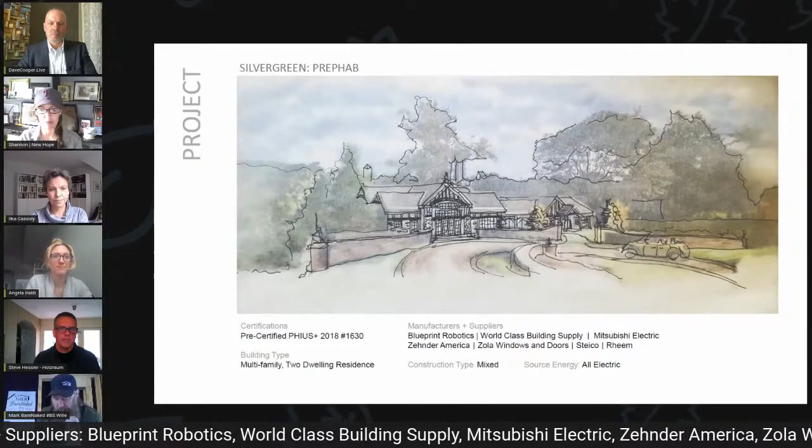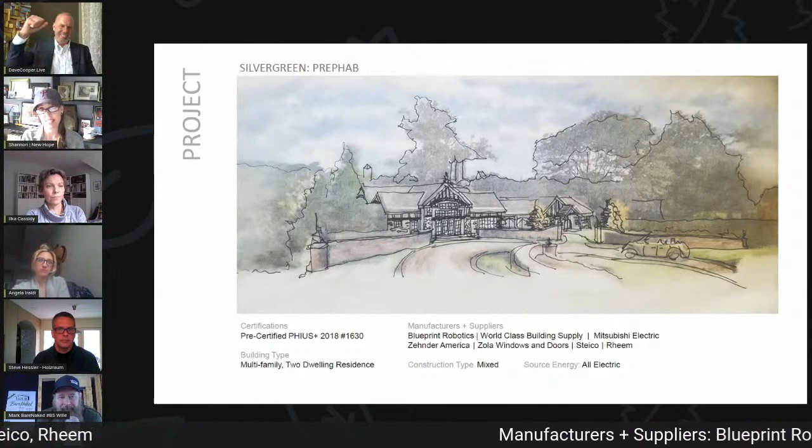So this is Silvergreen. I'm Shannon Pendleton, designer, Passive House consultant, Sanderson Design, on the East Coast in New Hope, PA. And Silvergreen is about 30 minutes away from me, and it's a Passive House. So we're going to explore how we got here, why Passive House, and then why prefabricate, because we chose prefabrication. It was the first time for me. And there's some lessons learned to share so that you can do it too. So we'll look at how those two choices changed our process and solved coordination challenges, and what we'd repeat or improve for next time.

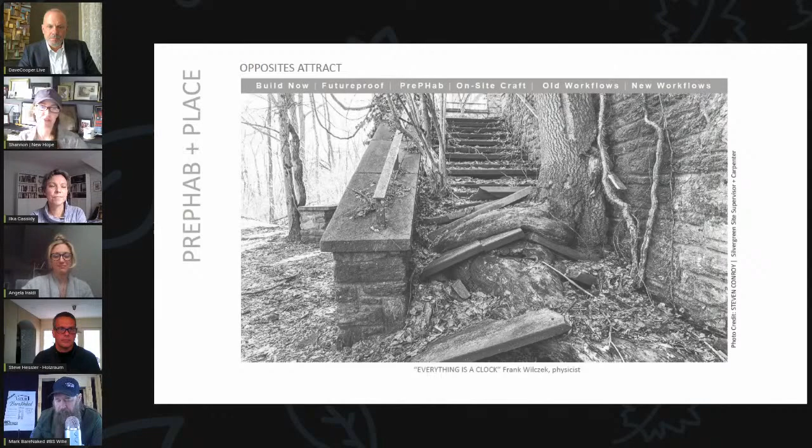So basically, our client asked us to design time and gave us the opportunity to marry a number of opposites. She wanted the house to look old, think new, prepare for the future, bring her community together, celebrate its past, and be an example for its future. So Silvergreen is 2 dwellings with a shared garage, a large community event space. It's all electric.

We took out the gas meter, and it's pre-certified 2018 plus right now. We're about 4 months from completion and about 10,000 square feet for everything.

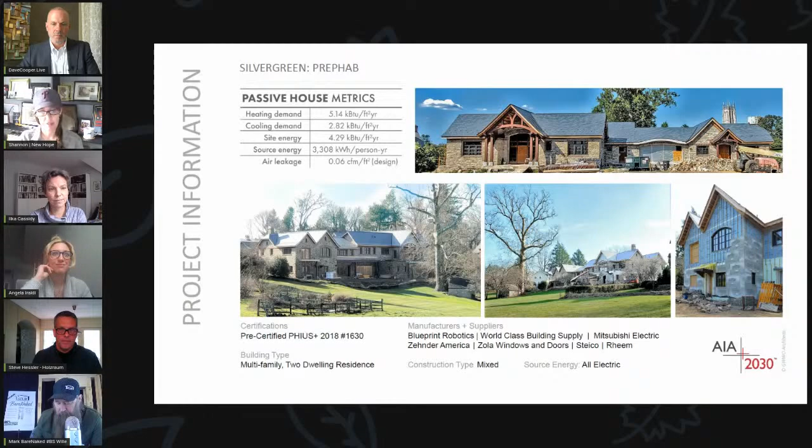So we were about 50% passive house experts and 50% first timers. But our experience was heavy on the design side. So we chose prefab to keep the hard build parts easy, the wall assemblies and the window installations. So we did it right.

Shannon, let me ask you a quick question. Can you just explain to our audience what IPD means? Because we're bringing two communities together here, and I think that would be very important for them to understand.

Right, so integrated project delivery. It means you assemble all the team players early, right? So if you want to take it down to just two, if you're an architect and you're drawing for a builder, it's great to have the builder around because you can call them and say, I'm drawing this detail, how do you want it built? Because there's no point in drawing it if you don't want to build it that way. And the two of us figuring it out together saves time and makes a better product.

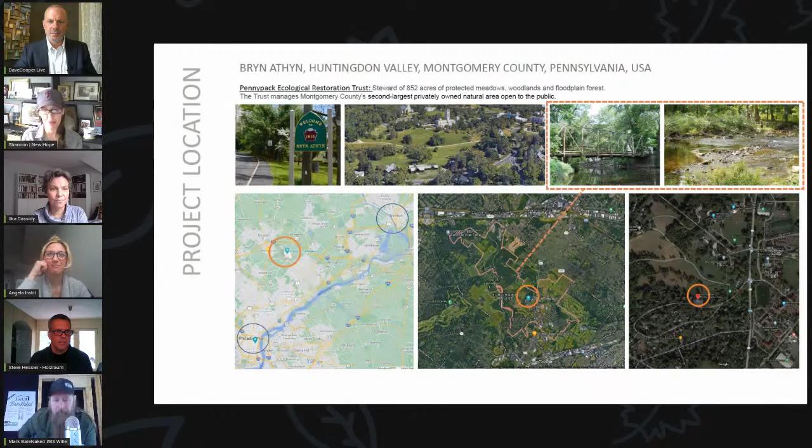So let's talk about where we're located. We're in Bryn Athyn, PA, and we're on a steepish slope. We're between Philly and Trenton, New Jersey, alongside a National Historic Landmark District and the Pennypack Ecological Restoration Trust. So our design priorities were for two sustainable homes that would fit with the community now and rent affordably now, and renovate in 20 years for aging in place when the owner wanted to move in. And we needed space for big family gatherings, a future accessible space for community events and fundraisers.

And if you look at these pictures, our oldest living residents on the site were the natural spring, the spring house, the wetland, and a 300-year-old buttonwood tree. And we also inherited a sentimental rental up there on the upper left, known as the Bishop King house, that we had to take down. We tried to save it, but it just wasn't enough to save, unfortunately.

So we also inherited the history of Bryn Athyn, which was actually founded and planned on our site, which is in the top center, back in the day. And luckily, the 4 windmill foundation stones are still there, and they supplied the community water supply.

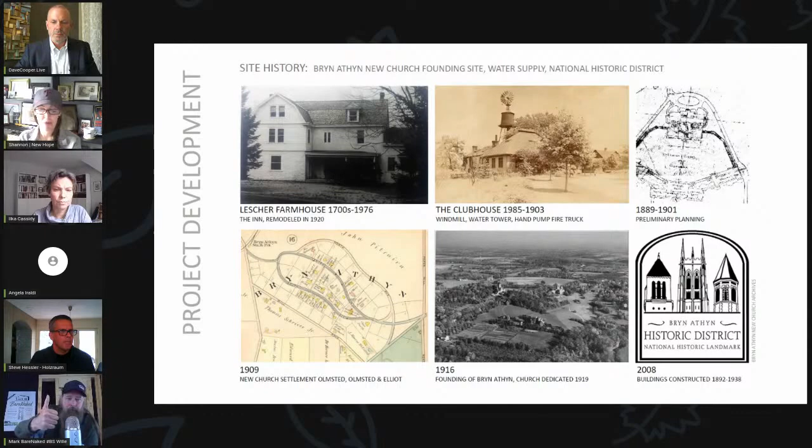So it's pretty poetic. So we talked to Susan, we determined our level of green, talked about the importance of certification, and gave her a crash course. And she chose Passive House. She's like, if we're going to do this, we're going to get the highest efficiency, the best comfort, and we're going to do it through passive means, conservation first. You don't even need renewables. You get 80 to 90% of the way to zero. No renewables, right? Just building it better.

And then using Living Building as our guide, right? It's harder to achieve. It can be a little more expensive sometimes, in my opinion. I'd love to be proven wrong there. But it helps with materials, with water, with site, with equity, and with health. So we were certifying Passive House, but we were referencing Living Building a lot for our products so that everything could be carbon smart and healthy.

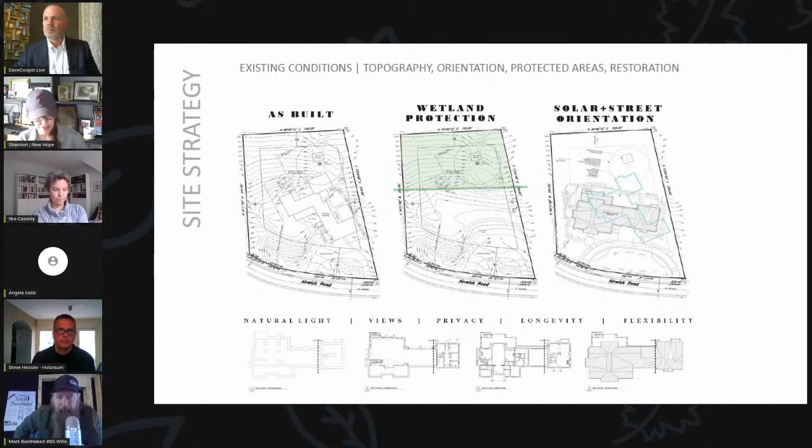So we determined our strategy and did some site planning for protecting our natural features. Looked at our solar exposure so we could do natural lighting and power potential. And we were aware of our position at the top of the watershed. And Think Green did this beautiful drawing. They basically drew up a series of strategies so that we could infiltrate all our stormwater, even during heavy events, over a series of days, just through gravity and rain gardens. And it flows through these destinations and past our windmill stones.

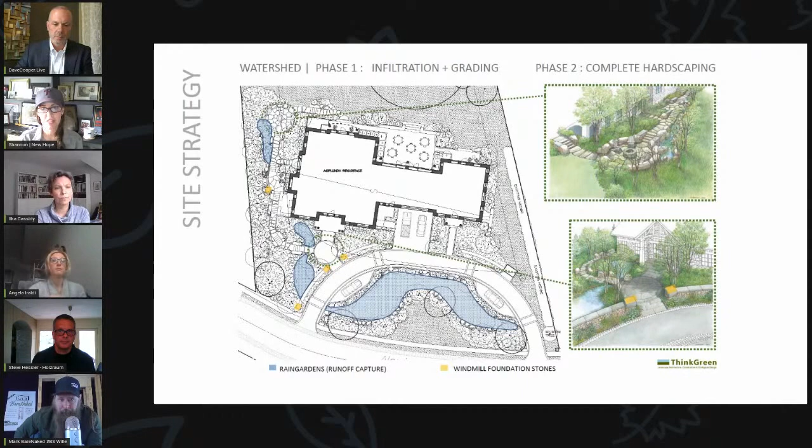So they were terrific. And our space planning strategy was secure the envelope, right? So a lot of people say secure the bag. If you secure the envelope, you've secured the bag. We wanted to make sure that she wasn't ever going to have to change the footprint or change the facade, and that it would fit in beautifully. But we would plan in this 20-year renovation so that she could move bedrooms up and down over 20 years, knock out walls, put in elevators, and finish the event space in the future.

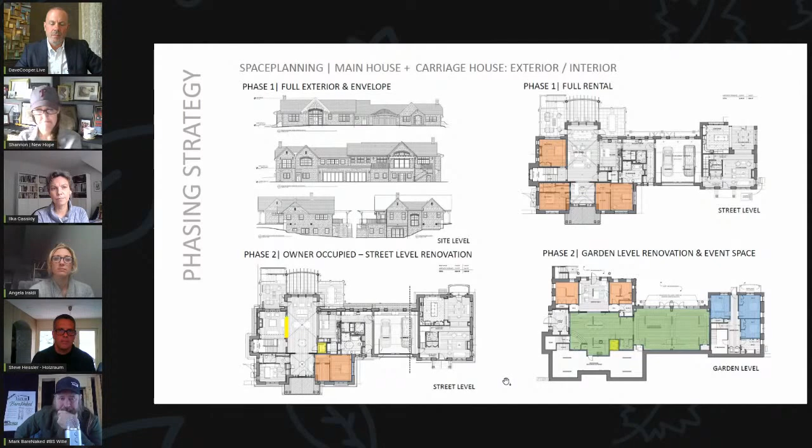So a big part of phase one was defining our envelope to be airtight, super insulated, and thermal bridge free. So if you're familiar with Passive House, this will look familiar. It meant selecting roof, floor, and wall assemblies, testing them for accuracy and performance to make sure that they were going to stay dry, weren't going to grow mold, and that we could size the right systems for something so efficient.

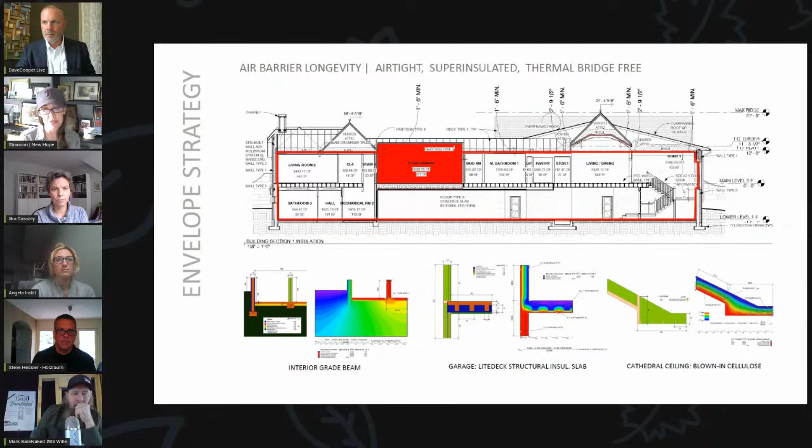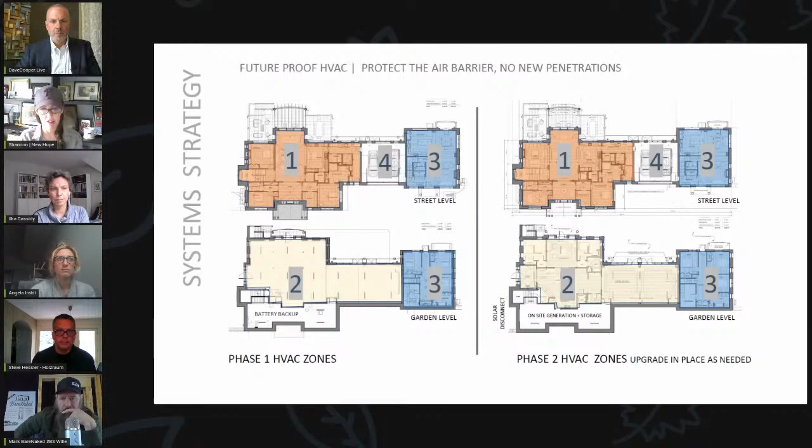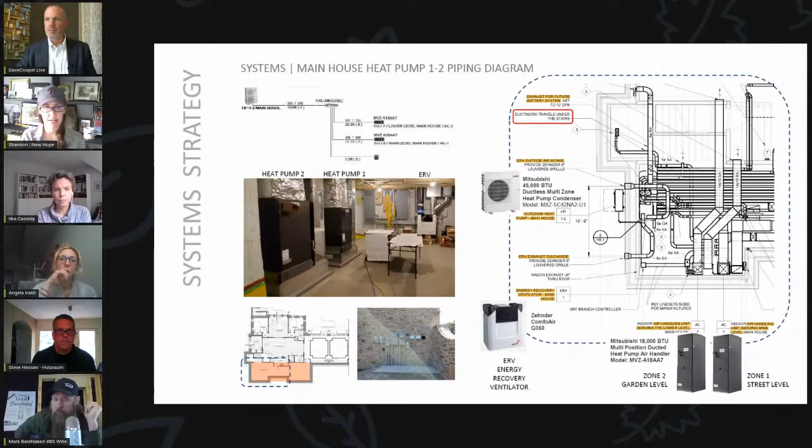We've got 2 heat pumps and an outdoor condenser for those and an ERV, energy recovery ventilator. And then we picked really smart appliances, heat pump hot water heaters, induction cooktops, heat pump dryers, and stuff like that. Made sure our CFMs on our range hoods were low. For the caretaker, it looks pretty much the same. We have a little smaller mechanical room over here, and we have a heat pump in there, Zehnder ERV, a condenser outside, and then a little cassette for the garage, because the garage is outside the Passive House envelope, so we're just going to do a little semi-conditioning there.

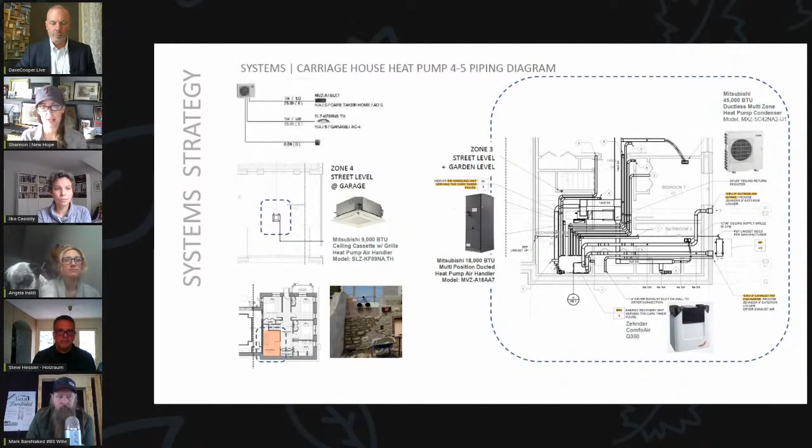For power, we are going for PHIUS 2018 plus, which means we need renewable energy credits now if we're not going to use solar panels to be fossil fuel free. So that's what we're doing. We're fossil fuel free, but we're still buying our energy, right? We're buying it through renewable energy credits. But we've prepped for the future. So we've got conduit to the roof. We've got a fully recyclable roof.

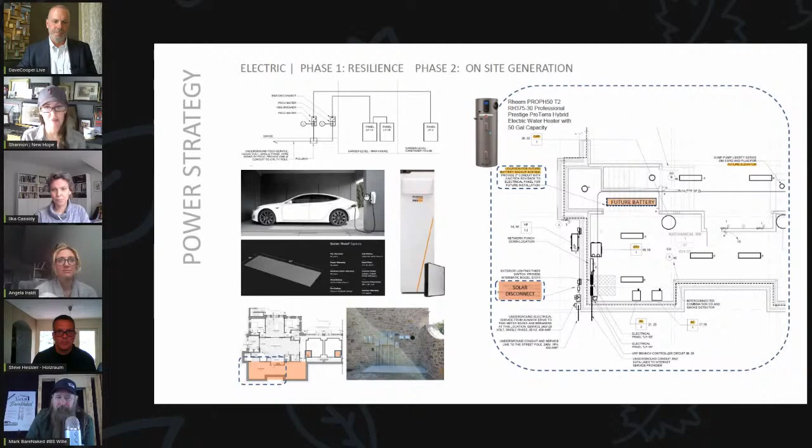And when Tesla finally gets around to returning our phone calls, because we've been on their list for years, we'll get those beautiful roof tiles and put them on and plug them in. And then we'll put the batteries right over here. We've already got our solar disconnect. We've got our spaces set up, and we're ready to go. We've got our car chargers installed. And so let's talk about the envelope.

Give me 1 second, Shannon. Yeah. Can you hear me? I can. So come back to the screen. I want to take a moment because we want to say hi to some of the people in our audience for one, and we got through the mechanicals.

But before we do that, because I want to try and get the audience a little engaged in this as we go through, you know, I understand the why, like I get it. That was an awesome explanation. But let's talk about some of the systems or techniques that you used a little more specifically. And were there any surprise learnings out of this process, right? Because you're putting in panelization with Blueprint Robotics, a highly robotic plant. And as you showed the envelope and you're showing the mechanicals, is there anything in that you'd like to share with us that was like, how did you do it? How did you pull all those pieces together? And then also, did you learn something you weren't expecting?

Absolutely. And that's what these last slides are about. But what's better is what I don't have in those slides that Angela and Ilka are going to go over, because doing the testing and verifying for this, she's going to show not only what we had to work on, but how we fixed it and how we got to where we wanted to go. I love it. The dynamic part that I saw is the creation of the envelope and that, as you called it, I believe, future proofing.

Yeah. So this building is set up. I don't know if everyone heard this. This is the first time I've seen this presentation. The details are so well laid out that in 20 years, this building will create a second life. No penetrations will happen. There will be no facade changes. All those sort of external legacy things are kept in place. But then there's going to be a new use for the building. It's intended for that.

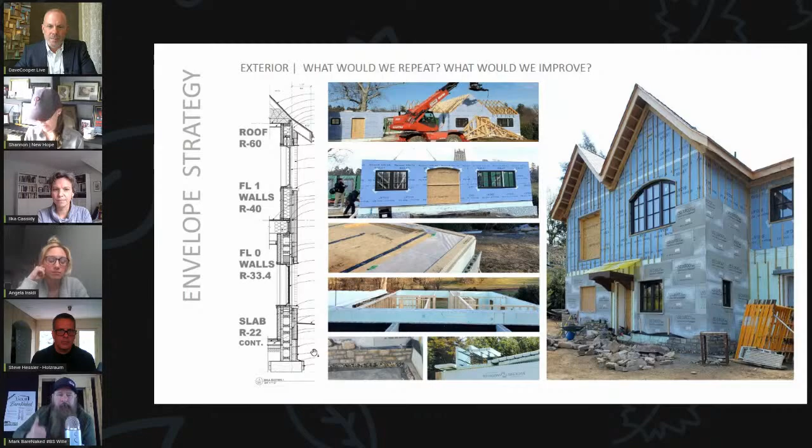And on the inside, we've got that air barrier coming up from underneath the slab, which we taped onto the Nudura. What I would do differently there is put our liquid air barrier on there to plug the little holes. I wouldn't change anything that we did with the Holzraum package. That came in perfectly. We had no discrepancies in the measurements because the team was so amazing during coordination.

And then with the ceiling, I love my SIGA air barrier, but I wish I'd gone with plywood just because we popped some holes in that while we were putting it up. And we also had a groin vault arch ceiling that we had to put in. And the sequencing there was a little tough. So I think next time I'd go with plywood there. And then we also chased some air leaks at the ADA door thresholds and at one of the ERV outlets because it was hidden under the stair and didn't get air sealed before it went in.

And I also would have coordinated with the subcontractors earlier. I tried, I called them. So if you're a subcontractor out there, just show up earlier because the digital twin that we create is down to the stud. And you'll get to see exactly what we have planned. And if you want to change it, that's the time to change it, not in the field anymore. Become part of the team earlier.

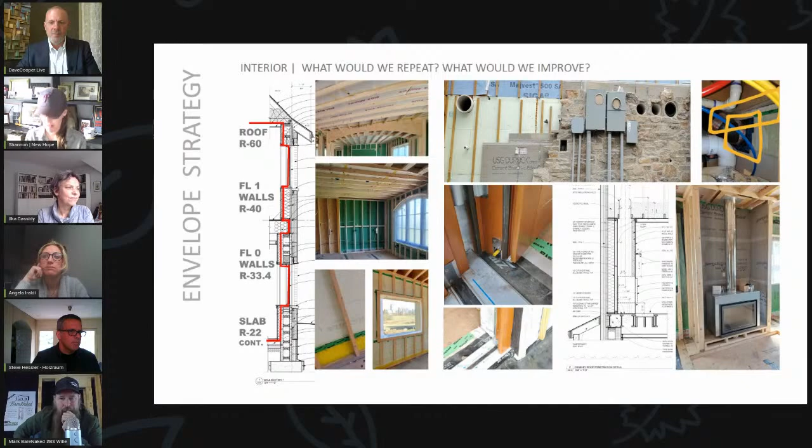Just back your whole workflow up one stage. Make construction administration, construction documents. Make construction documents, design development. Make design development, schematic design. Just back it all up and get everybody on board because you're going to do shop drawing review, early drawings package release, and a window and door order before your construction documents are done. But what you're going to have is a knowledge of how everything goes together.

You're not going to have substitutions in the field because it's going to show up with the materials you specify, down to the FSC woods and the carbon smart insulation. And so you're going to have less waste and less change orders. And everybody loves that. So plan for a couple extra blower door tests too. You might need those. We sure did, even with all this planning.

So with that, I'm going to hand it off to Ilka, and she's going to talk about that digital twin. And then Angela's going to talk about the verification and where we made our repairs. Yeah, so I'm just going to keep it brief too, because I know that Steve is actually waiting there with the digital twin that we generated for this.

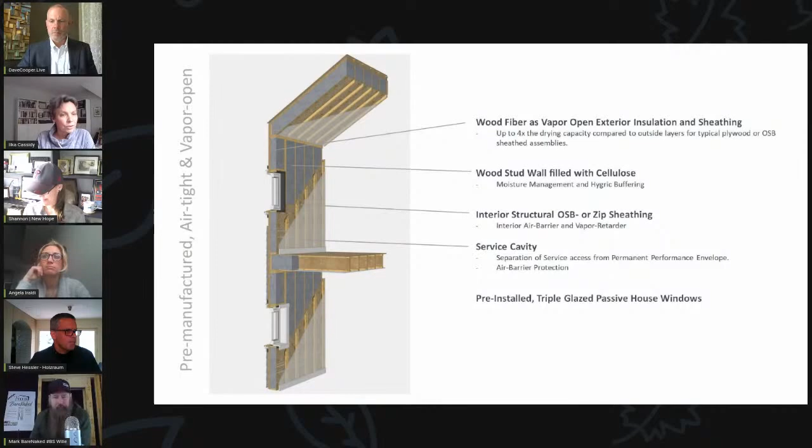So that's looking at the SIM really quickly. What's really important to mention is that in every case, as soon as you go with prefabrication, every component has to be modeled. So a translation from a design intent, in this case we got it from Shannon in form of a Revit model, has to be translated into a parts-based model.

And the outputs from a design intent or a volumetric model and a parts-based model are very different, and we'll see that shortly. For us, generating this parts-based model also means there's great potential in using it further, not only for the fabrication, but for communication with all the other trades and through the design process with everyone who's involved. So everyone becomes a part of it, and the SIM model becomes a very visual tool for communication. Next slide.

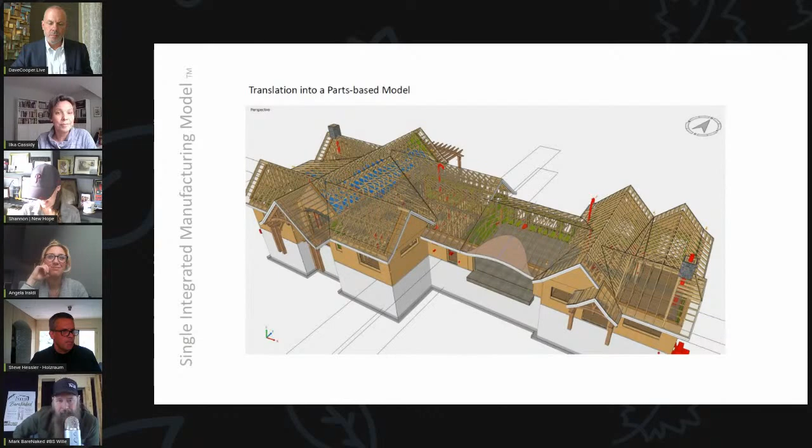So here we were able to do clash detection with MEP and coordination with concrete, steel, roof trusses, and other prefabricated components within this single high fidelity model. Because we have the exact locations and dimensions of everything, and because we know that the robots are going to build it exactly the way we drew it, we have the chance to generate drawings and hand them back out to other people involved.

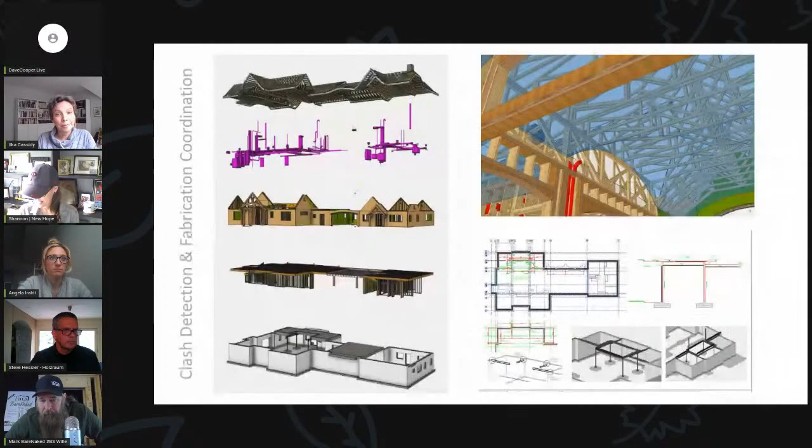And here you can see that we could generate a steel coordination drawing and provide 3D drawings to other fabricators like this groin vault. Next slide. And then the same model is used to generate outputs. In this case, we worked with Blueprint Robotics. So it's data, it's machine files, but we also generate reference drawings, reference panel drawings, and that's what it looks like. Next slide.

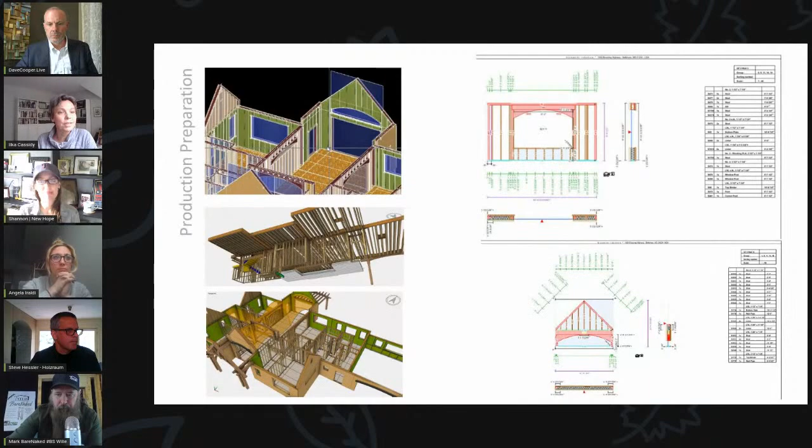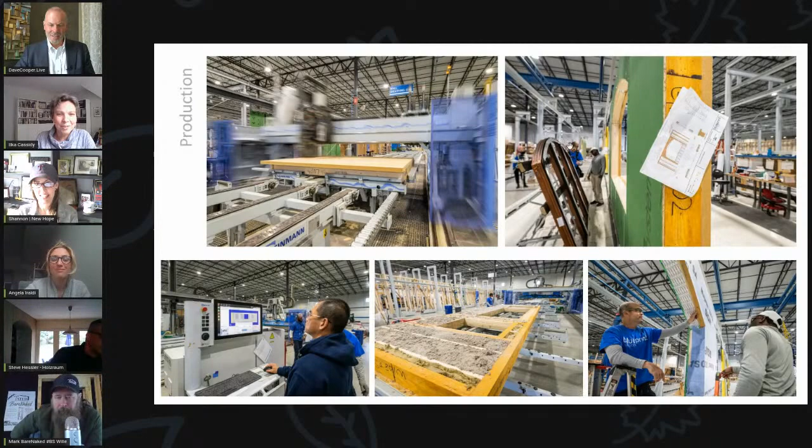And this is kind of what that looks like in action. So these are the files in action, and then actually our wall drawing there is pinned to this wall, and everything worked out perfectly in the factory. This arched window was kind of a challenge, but it all fit together. So that was great. Next slide.

And then again, out of the same model, we generate documentation for the installer. So in this case, the installer was not the fabricator. So we had to make sure that the installer also got all the information that they need with panel sequencing and installation drawings. Next slide.

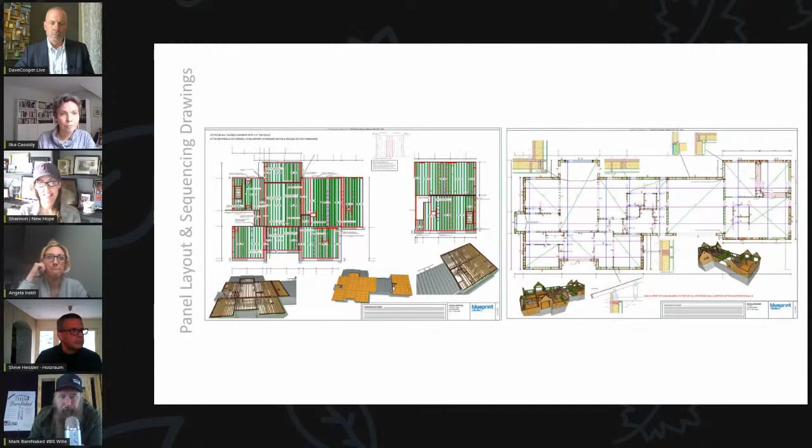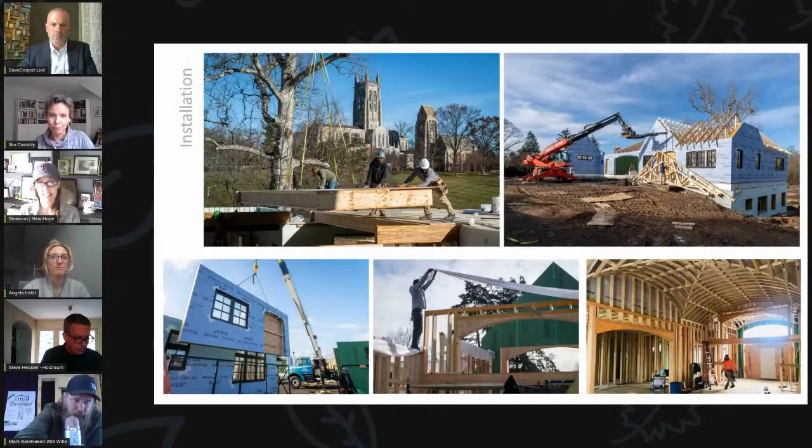And this is, again, what it looked like on site. Sequencing is also very important for passive house because membrane layers have to go in at certain points during the construction. So we're able to kind of communicate that early on too. And then this little beautiful groin vault there fit perfectly as well. Next slide.

And then one last thing that I want to mention is, here in Pennsylvania, as soon as you move into fabricating closed walls, that means you can't really see the structure and the insulation in the walls. It's considered a closed wall, and it calls for a third-party review. It falls under the Industrialized Housing Program here in Pennsylvania, and that is very, very rigorous.

And it's set up for modular housing, and it doesn't all make sense for just panels where there's nothing really in it besides the structure. So we wanted to mention that because we do see that as a challenge, especially as more and more smaller manufacturers come online, because of this whole process. And yeah, talking about third-party review, that's kind of what Angela was doing, then continuing with the Passive House certification.

I love it. Go ahead, Dave. Are we at the end of the slide? Yeah, my part, yes. Now it's Angela's turn. I love it. Before we jump back in, Angela, we have some comments that have come through and some questions. Mark, you want to jump to those for a few moments?

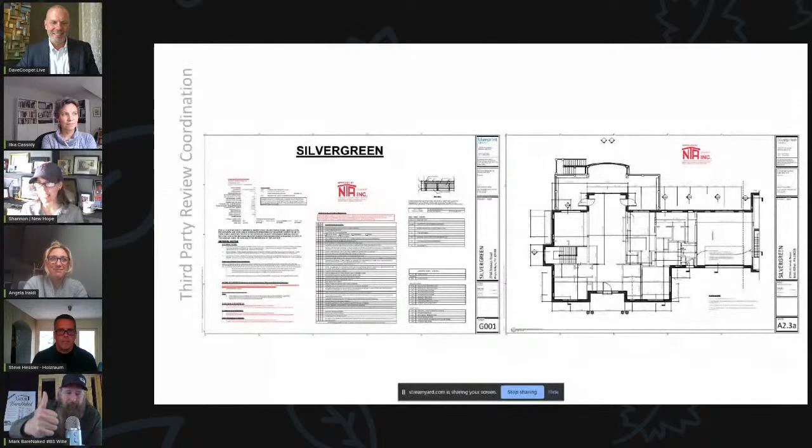That's a perfect segue. So Steve, get out your pen or pencil or laptop and gear up for the notes from Angela and Steve. And I guess Angela, you're going to take us away. All right. Yeah, that sounds good. Thanks. Shannon, are you good to share? Yeah, the presentation's no longer up. So if you could put that back up, Shannon. How's that? Sorry, I thought we were going to Steve. My fault. Can you see it?

Yes. Perfect. Great. Okay, so transitioning to the verification piece for just a few minutes. So we like to use this little example reference, what to expect when you're expecting. But it's like so many things in life. It would be great if we had a book to just tell us everything that we need to know about passive house verification, right? But unfortunately, that doesn't exist. And no matter how much you plan, issues are still going to happen. And that's okay. It's usually nothing that we can't clean up, fingers crossed. So I'm going to walk through just a couple things that came up in navigating this project, and I'll speak to what those looked like. So next slide, Shannon, whenever you're ready.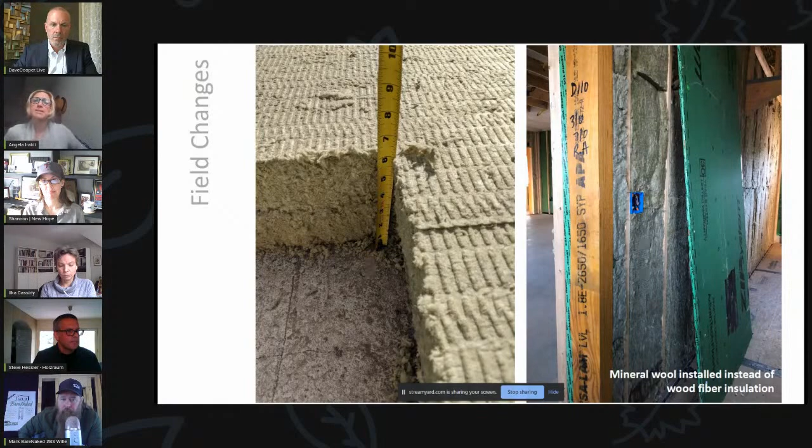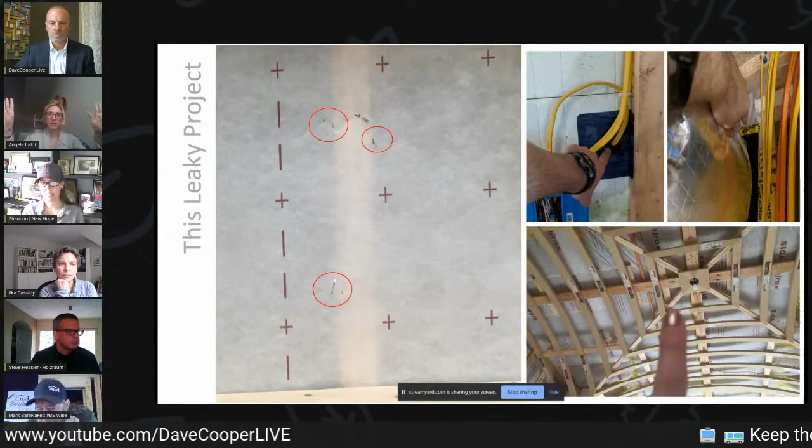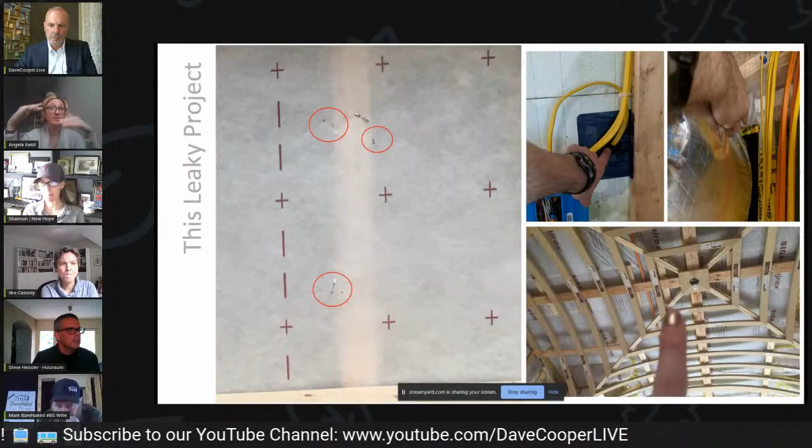So thank you. Yeah, and the last thing that I wanted to point out on this slide is, in addition to it being the rater's job to find these issues and report back, it's also so important to preclude issues as much as possible. So the photo on the bottom right side of the screen, you can see we have our air barrier installed. And what was getting installed on top of this air barrier was loose fill insulation. And SIGA actually recommends that you install battens to support the load of that insulation so that when that insulation gets installed, the air barrier is not pulling away from the structure and completely losing its function.

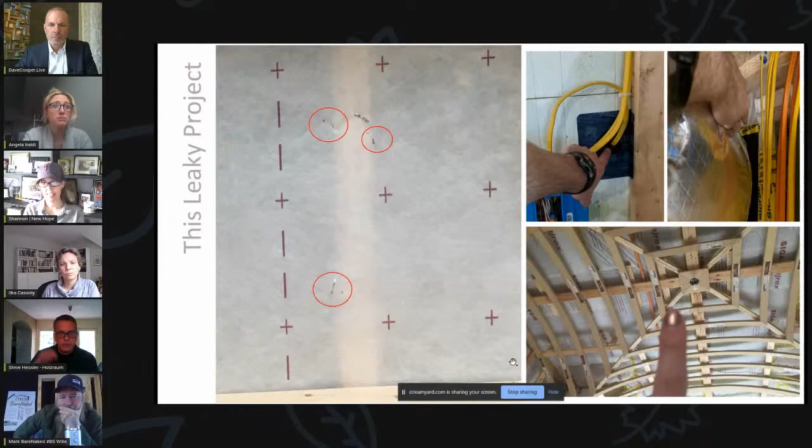So that was actually something that we saw when we went out for our preliminary blower door, that those battens were not installed. And we did note that and recommend that, and the battens were subsequently installed. So that was our first blower door with these issues noted, and we failed. So next slide, Shannon. But that's okay because we kept going.

It's okay. It's okay. PH, Angela. Exactly. But we kept going.

We went back and we taped over the staple holes throughout our air barrier, as you can see that Shannon's pointing out. Also what's so important is doing IR scans throughout to identify different leakage points, especially in areas where you can't directly access. For this project, we're dealing with higher ceilings in some of the areas and we can't get up there necessarily. The IR gun is so amazingly helpful.

And we involved the team. When you're dealing with passive house airflows that are so low, leak chasing can become this brain teaser puzzle treasure hunt, whatever you want to call it. It can be so difficult, but it's also so satisfying when you find all of these leakage points.

And I also want to note, I think an important unspoken duty of a rater is to help educate the builders. Our Silvergreen team was so awesome. Me and my colleague Nick went around with the team and pointed out all of these things that we were seeing. And they got it, right? As soon as we started explaining to them, they were like, oh yeah, that makes sense. We get it. We see what you're seeing now.

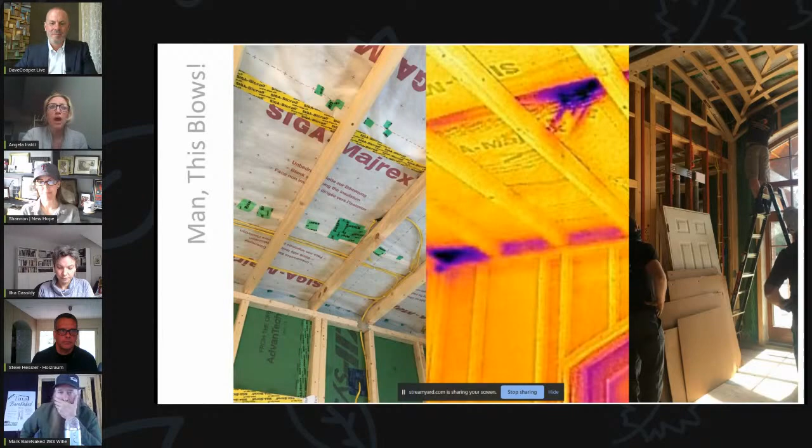And after a little while, it turned into this little competition among some of the guys to see who could find the most holes. So even though we were like, what the heck is going on, it became this really fun and kind of educational piece of the project. So this was our second go around, and we patched up as much as we could. And we failed again, but next slide, we tried again.

And this time we were really looking at the smaller details, right? So we went back with more tape on our ceiling air barrier. We also went back and applied liquid mastic over the tape adhering our sub-slab vapor barrier to the ICFs on the lower level of this project, because those ICFs, and I think Shannon mentioned this earlier, actually have these tiny little ribs in them, which are tiny little pathways for air leakage. So we went over and made sure that that was totally sealed up.

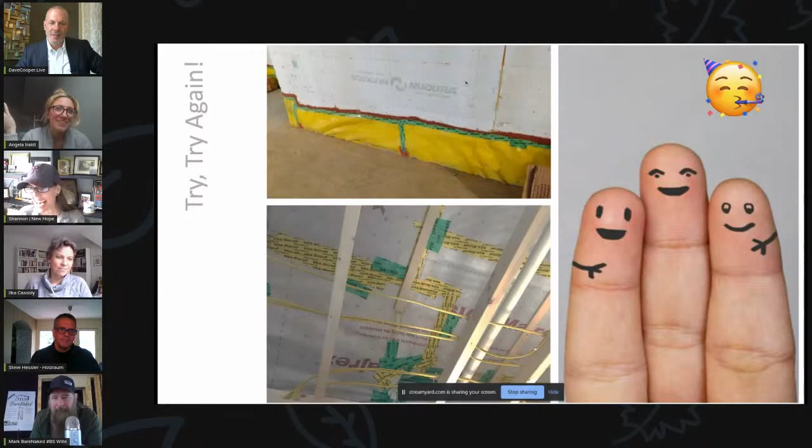And third time's a charm, I guess, because we finally passed our blower door test. And I will say, it's actually really nice that it took us a couple tries, because it would have been super boring and uninformative if we passed the first time. So it was nice in a way that it took us 3 times.

Next slide. And then let's see. Oh yeah. So at this point, we feel like we're in really, really great shape and set up for success for our final testing and inspections. And we're excited to deliver, hopefully, a very successful project come this summer.

Fingers crossed. I love this, and you know, we're at our hour and a half mark, so if you guys are good with time, we can give it a few more minutes here, but I just want to make sure that we also have an audience out there.

There's a couple more questions, but I want you to think about, before we end the show, what is your one thing that each of you took away that you would maybe do different from each of your roles on the next project? Like, what's the learnings of this, right? When you say, well, all the times you failed the blower door test, what will you do differently up front to help people that are looking at this, to save them from making the same mistakes or doing some things that they could do better? So it'd be great to get each of your opinion on that at the end of the show. But what an awesome presentation.

We're pretty close to one of our longest shows, and my face hurts from smiling. I was gonna say, Dave, before we get into people's feedback, can we pass the mic to Steve so we can light this firecracker off? Yeah, let's do it. You're muted, Steve. There you go. Hey guys, do you want me to share screen real quick then? Absolutely. The digital twin, bring it. Do I need to stop sharing? Nope, you're good. I want to make sure I share the right one. Oh, okay, good. There we go. It's all popping up. Okay, cool. All right, thank you, Mark.

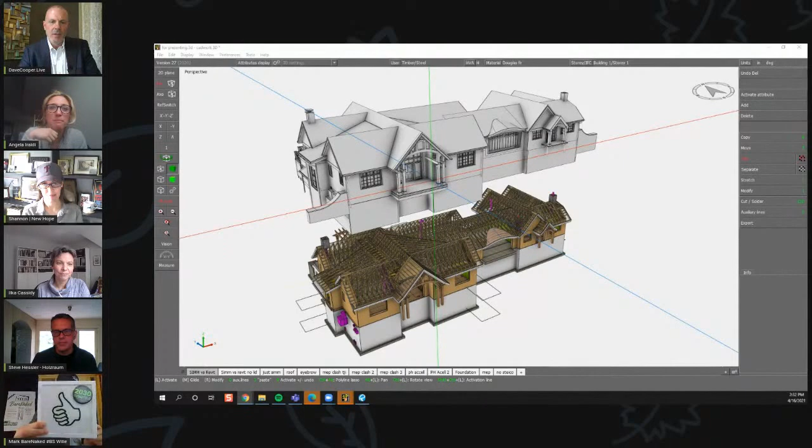I'm gonna go really fast, and then if anybody has questions. There was a question I saw earlier about the software and how we create this. We call this the single integrated manufacturing model. So basically, it's kind of a hub of info. So we're creating a lot of the content, but we're also able to bring in and then send back out content, mostly through IFC file. So this is actually Shannon's Revit file, the white one.

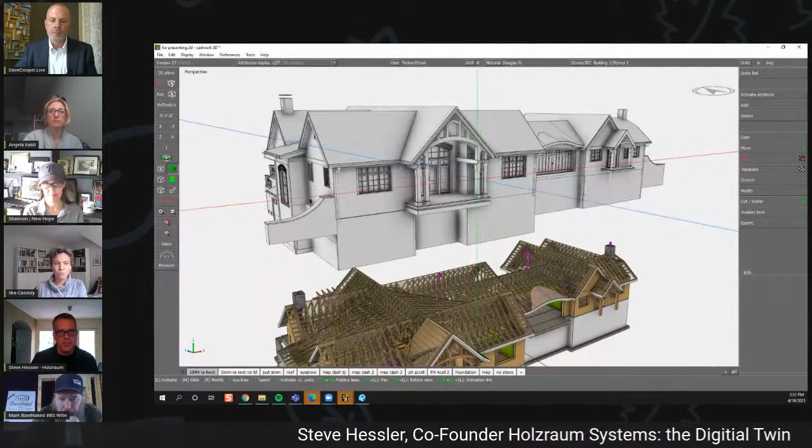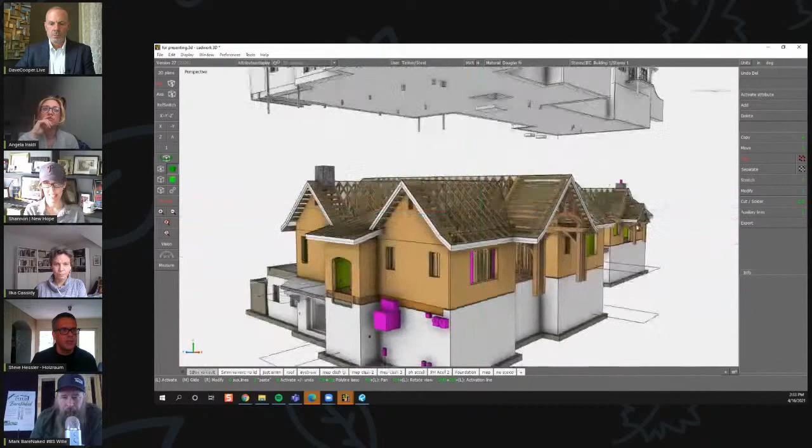And the difference, what we like to tell people, is there's a difference between a BIM model, which is this model, obviously simplified in a single texture. But as you can see, this is a very, very high fidelity BIM model. The detailing is excellent. Inside, it's amazing. But it's a volumetric model when it comes to structure and systems. So it doesn't really have framing in it that you would build. And so we can't necessarily create the SIM model without knowing what the design intent is. So the BIM is critical for design intent.

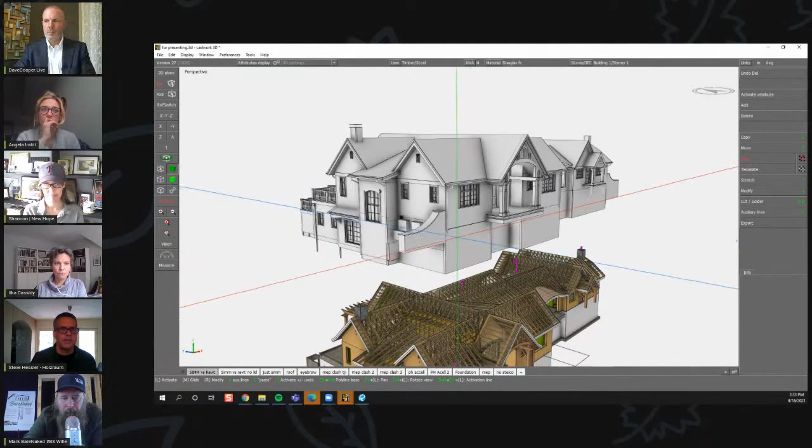And so we can bring in design intent, and sometimes we can use some of the design intent more than just reference, but a lot of times we'll just rebuild because the tolerances and planes are different. Revit doesn't need to worry about where the lining of the framing is to the same level that we do. So here's just another look at the difference. You can see what an awesome Revit model this is, but this is the wall, right? That's what you have, and we can't manufacture from that. So we need to create something more like this.

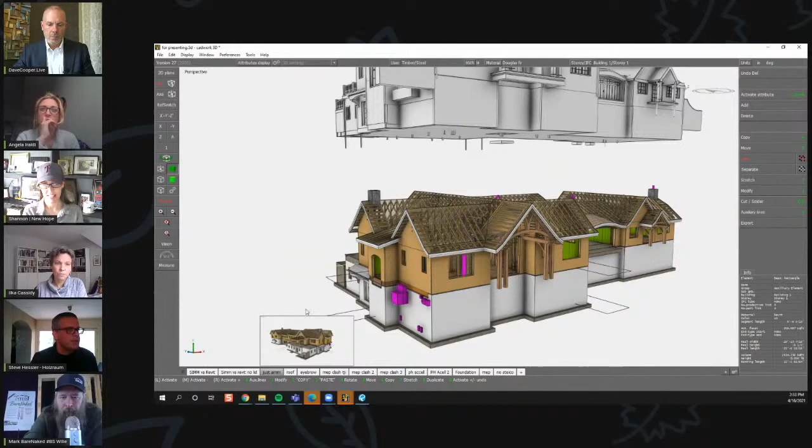So this is just a SIM model. I'm just going to kind of blow it apart a little bit. So this is the truss framing. We basically start, sometimes we'll start from CAD drawings. Sometimes we'll grab a section or two.

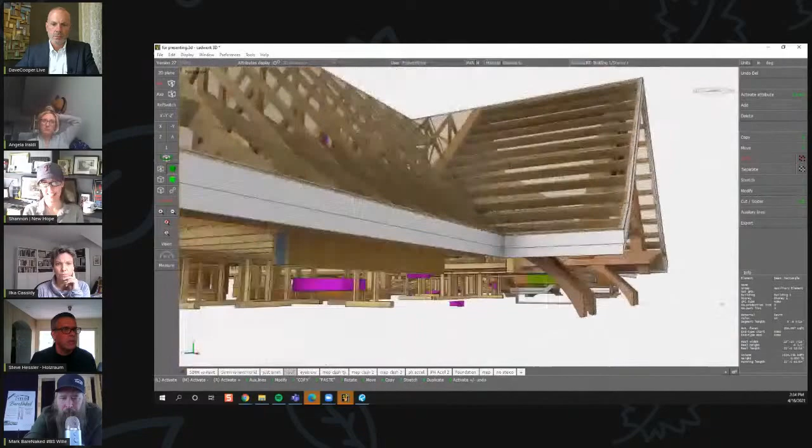And in this case, we basically modeled out every truss to make sure that, you know, there were some complicated kicks that were kind of creating some crazy joinery. We want to make sure that the geometry, when it lands, is not going to give problems for the carpenter. So we actually will model a lot of times the millwork. And in this case, to make sure all that millwork lands correctly, if you follow that millwork around, there's some pretty high tolerance stuff happening.

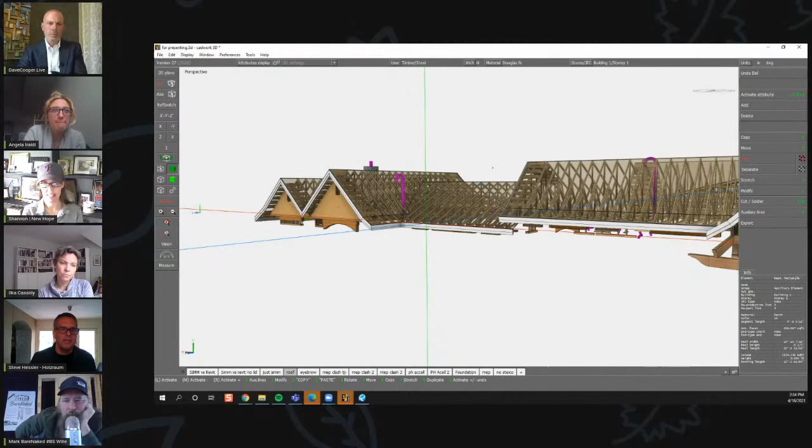And then, of course, it also coordinates with some steel, and it coordinates with timber framing. And so we can import and export. We can kind of design content when we need to, or bring it in. I'll show you the MEP in a minute, but just staying on this. Another question I saw was about the groin vault. So this geometry for the groin vault actually came from Shannon's Revit model, which is awesome.

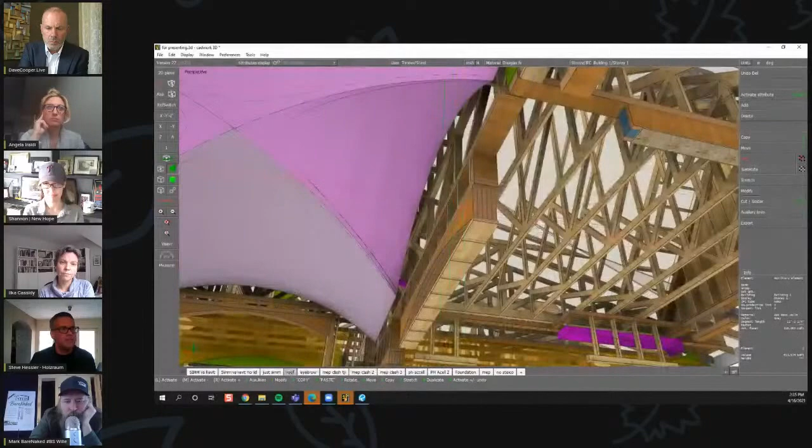But we needed to coordinate with the company that prefabricated the groin vault systems, and we wanted to make sure that they were going to work not only with our panels, which I will also show you, but we actually had to coordinate with the truss guys so that they could make sure that they designed the roof trusses to work. So when it came down to it, we were back and forth with the roof truss company to make sure that we all totally agreed on that geometry and that it would land nicely on our walls.

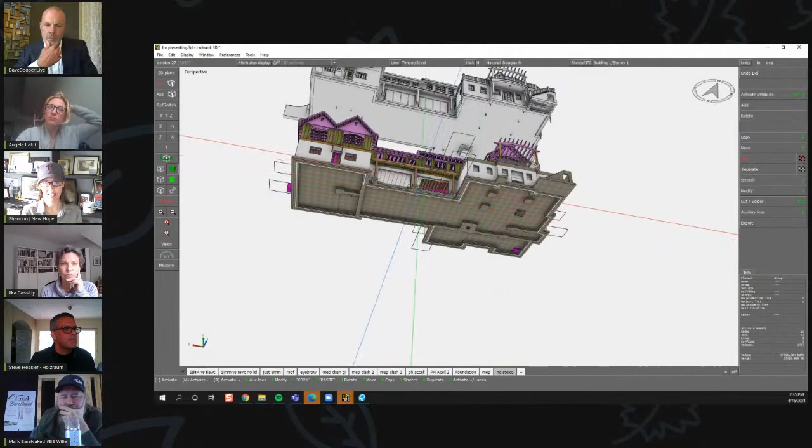So, you know, if I take that and let's see, this is sort of like our walls if I took the wood fiber insulation off. So what's really nice about this model too is as it develops, we can really navigate. Oh, I didn't answer the one question about software. So we use Cadwork. This is all Cadwork. And so what's nice is in this model, as we're building it, we're organizing it, not just for our use, but also for the builder's use.

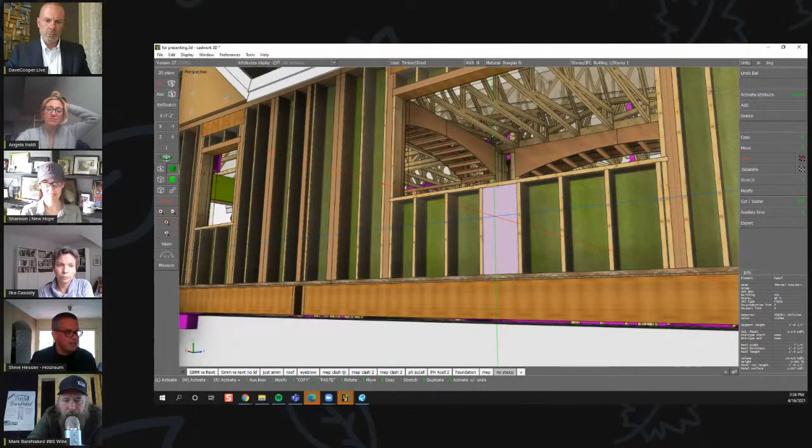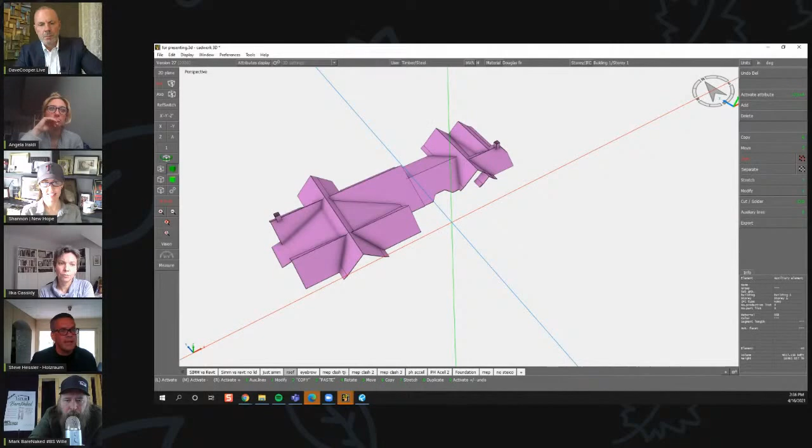So you can grab a kind of material and you can just say, I want to look at that material. So that's actually the insulation cavities. If I want to go back and I say, I want to just focus on sheathing, I can grab a piece of sheathing. And now I'm really analyzing very closely exactly what's happening with my sheathing. This was also really helpful. I actually was a lot in the field because at the time I was with the GC that was hired under the GC to kind of deliver the envelope.

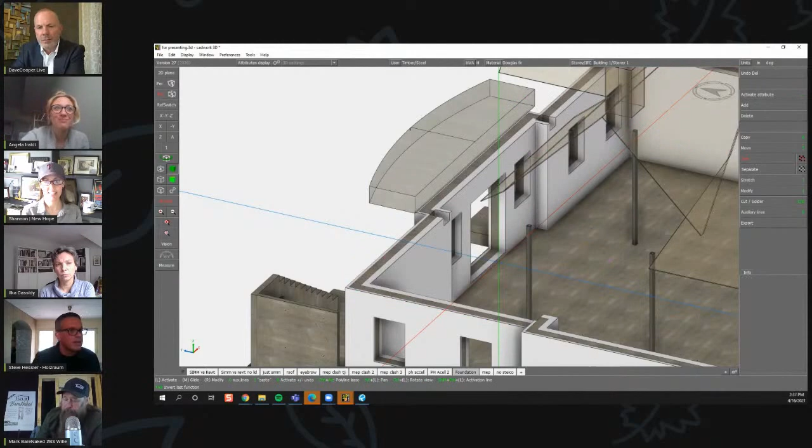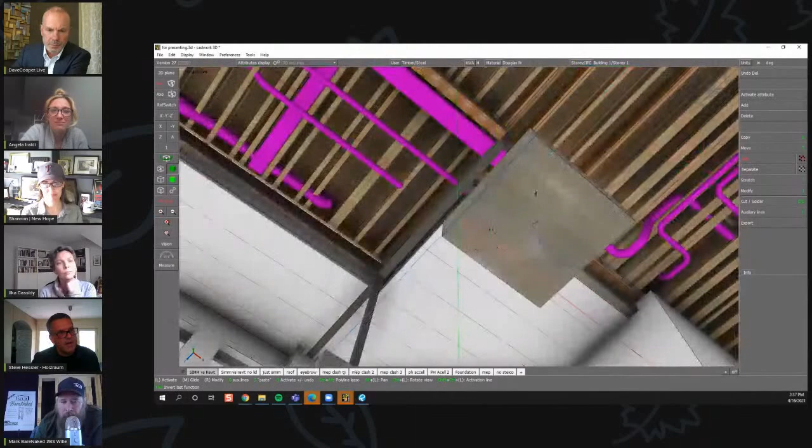So what was awesome was to model, there's some crazy light deck. So like in here, let's see if I can get that in there. Sorry. Yeah, so there's like, I got to take this off. So you see this? This is light deck. We've never done it before. It's an insulated form. It creates that structural. So there's a beam and a rebar schedule in there, and so there's a light deck spanning right here, below the garage, and then there's a light deck under here. This is in the passive house envelope. So there was some crazy stuff happening.

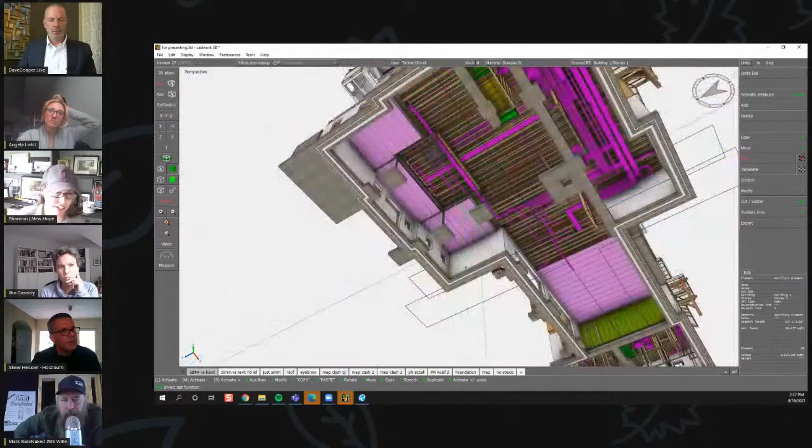Can you give us an idea on size on what those light decks are? Because I don't think people realize how expansive that is. Yeah. Well, for the garage, you're at about 24 feet. Yeah, so these are the forms. This is what they actually look like. And these were, I think that's going to tell me. Yep, 24 foot 4 5/8. And then there was this system out here. And then there's obviously this really complicated rebar schedule.

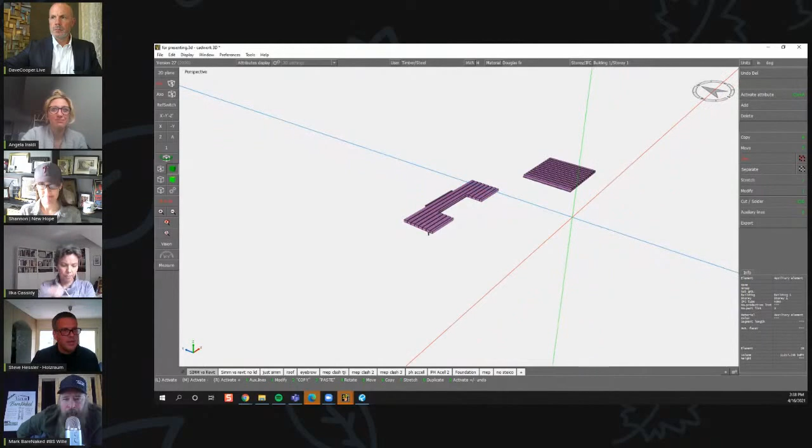But what was great is that by modeling it, we were able to not only coordinate and make sure that it was all going to work with the panels and with the structural steel, but we were able to actually create some quick trade coordination drawings. We do a lot of trade coordination drawings. So once you have it in the model, you can export some pretty good trade coordination drawings. Well, that's okay. That's all right. I won't get into that. What else was I going to show you?

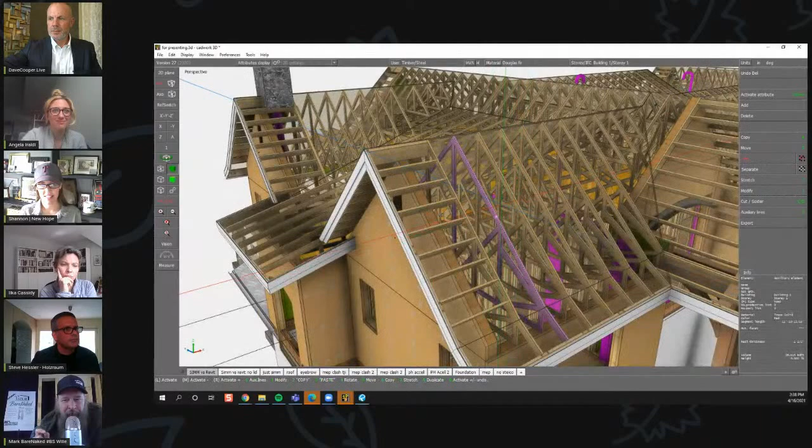I interrupted you. I want people to understand that I interrupted you, and you took the click of your mouse and you showed us that it was 24 feet, 4 5/8 inches long. That wasn't a guess. That wasn't an approximation. That was a specific answer in the middle of this wonderful run through. So brilliant the way you introduced it. Now imagine you're on the team, the builder's on the call, the subs are on the call. They're talking to Steve, who is a builder. Ilka's an architect. We've got 3 passive house consultants, and everyone is talking about the actual, we're on the job site right now.

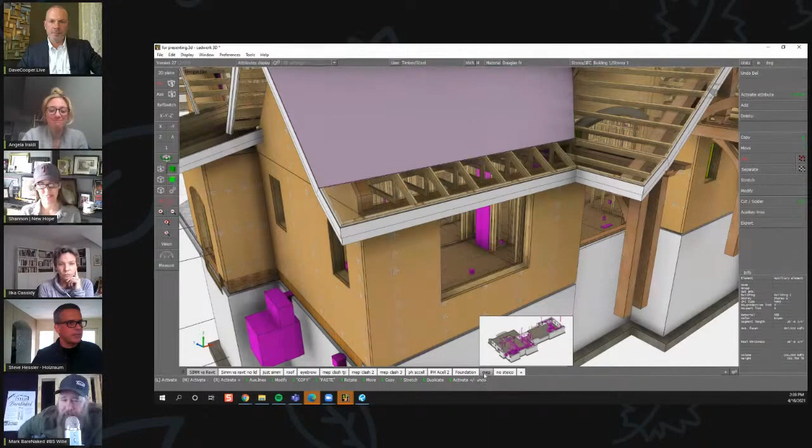Yeah, either on the job site or virtually, right? Because that's what's great is a lot of this actually happens before you've bought a piece of lumber. I was going to real quick just show you the MEP. So this MEP, oops, let me get that off there. This MEP came from Shannon's team with Revit and Shannon, the mechanical engineer.

There's some issues that we kind of had to work through, but what's great is, when you have this model, you can navigate through this model very quickly by activating along material or group or almost an endless number of layers that you assign to the objects. So that means you can then start to stack things.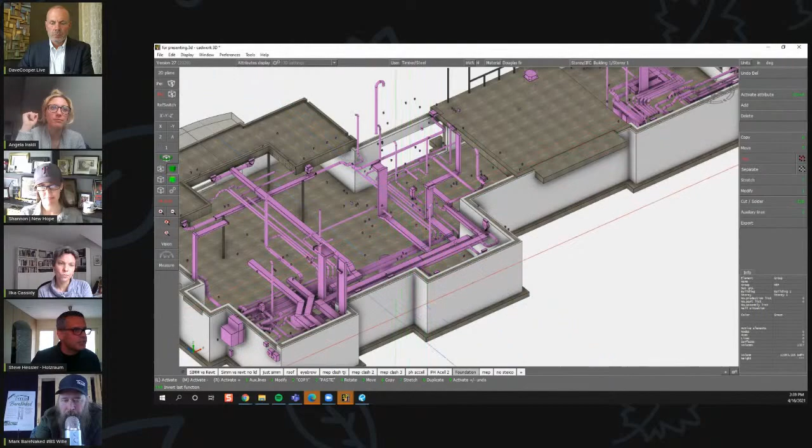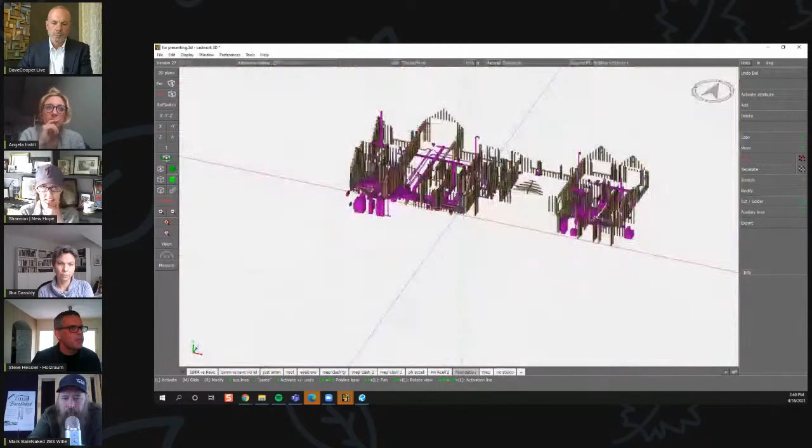So if I say I want to look at this, and I'm also interested in what the relationship is with every piece of spruce pine fir, then I can do this. And now I'm actually looking at MEP only as it relates to spruce pine fir. And I can look at anything I want. And then if I want to bring in more, and I say I'm interested in what it looks like with concrete, then I can add concrete. So you can very quickly create a custom visual.

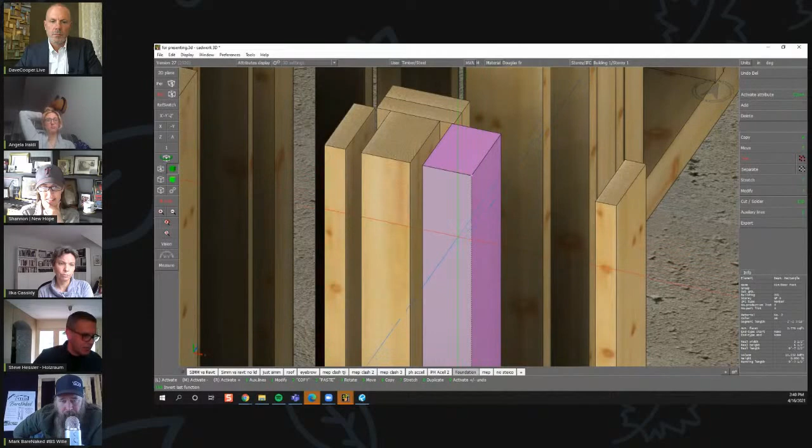And then what's insane is you can assign data to ridiculous levels to every single piece, every object. So if I hit one, you see that data? That's a scratch in the surface of the kind of data I can apply to that part. And that means when I can apply data, I can export data, and I can export it into a spreadsheet that could be accessed by just about everybody on the team during design and then long after the envelope is complete. So we basically deliver this model with a lot of data attached, and we hand it over to the builder when they're done.

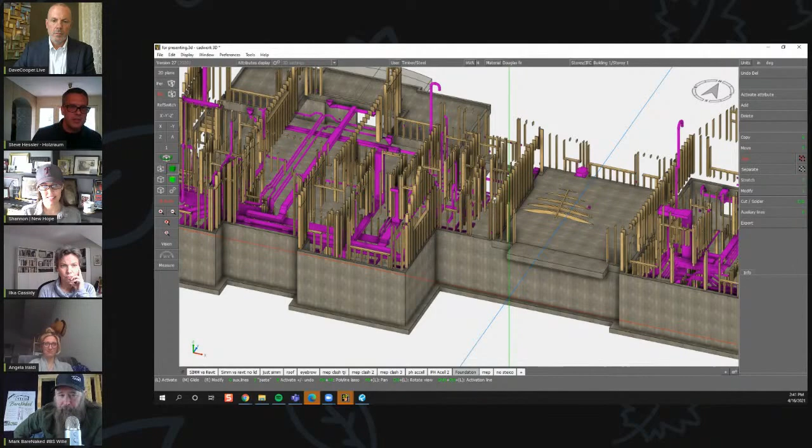And then the other day, I have this awesome picture I was going to show you. I walked into the job trailer for our next project, and the builder said, I want to look at this one structural steel detail that we coordinated with him. I'm like, awesome. So I go into this job trailer, and I almost cried because he had a laptop open with our sim model, and he had already navigated to the detail and pulled up the things that we need to look at. And I'm like, dude, just stop. I'm going to cry right now. So that's kind of what Ilka and I want. We want this thing to become a user model, not just for us.

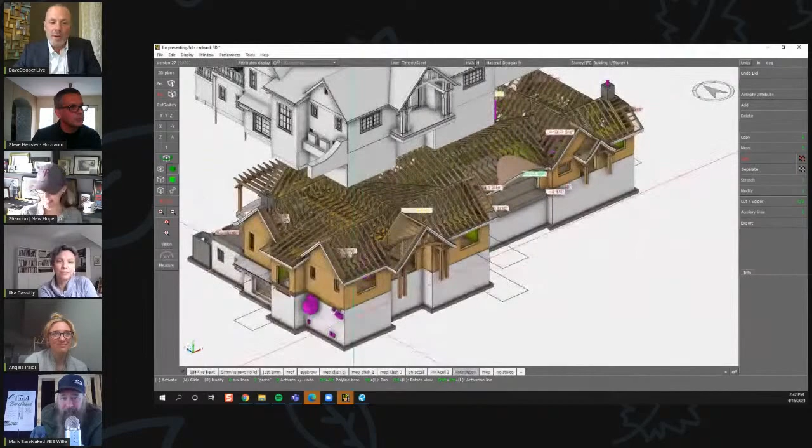So I want to elaborate on this because this digital twin is so important, right? This whole idea of field verify is kind of out the window. The accuracy of what these BIM models and Revit models can do is amazing. But where the rubber meets the road is money in the pocket of developers, builders, people out there. I want to understand, from a cost savings perspective, did you have to over order by 20% to cover your materials? Did you have to have additional dumpsters on site? How many change orders did you have on this project using this digital twin? Because change orders cost time and money, not only for the builder, but for the customer.

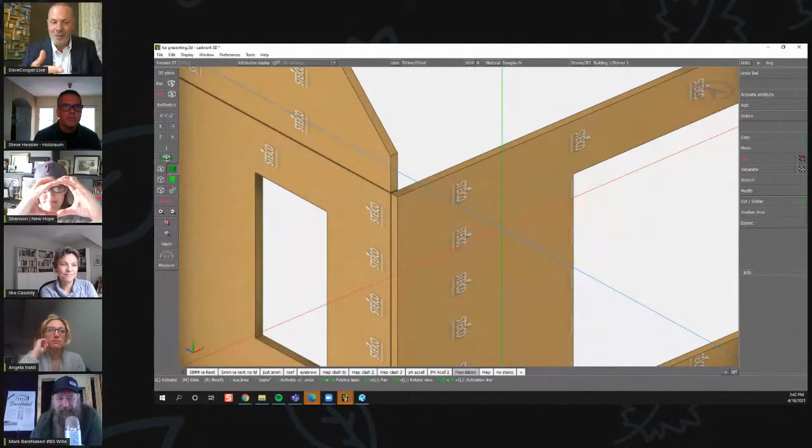I see Shannon there. This is the message we have to deliver, and we got to talk to people's pockets and understand that the efficiencies behind these systems make up for some of the costs of implementing these types of systems into your process. And this is what people have to understand. So I'm saying that, but you go ahead, Steve. Tell us how many change orders you had.

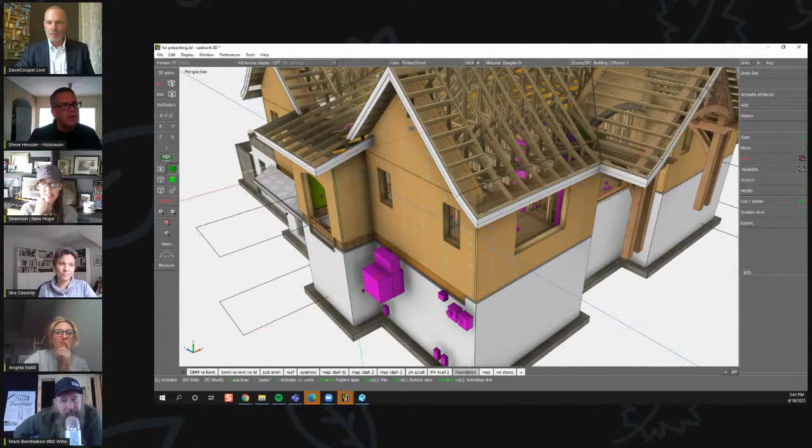Well, Shannon is the one that can tell you about the change orders, but I can tell you because before Ilka and I started Holzraum full time, she and I were basically the clients, right? We were the people doing this, but we were doing it for our projects. And I can tell you that easily the amount of time that it takes, because you remember, you need a production model of all the parts that are going to be panelized.

You need that, right? So you need this type of model. So the extra time it takes to then turn it into a sort of a fully inclusive coordinated model is a known cost, right? Compared to the risk mitigation and the potential change orders and things that could burn your schedule, your material costs, your labor costs, your momentum, it's just impossible. So I can tell you from our personal projects, it's a no-brainer. It easily pays for itself in the first error that you find.

And you know, Steve, you gave me a couple flashbacks when we were looking at that, because we had to take out a pocket door because of a piece of mechanical that we hadn't coordinated perfectly. I've been drawing houses forever, and usually this is happening in the field. We hadn't put the door order in yet, so we didn't have to deal with that. We fixed it in the model. We never ordered that door. I wasn't happy, but you do need the mechanicals in that spot. So we came up with another design solution. Yeah. And that's the opportunity that this gives you on a micro scale.

Yeah. So I don't know what else you want to add. Steve, that was really fabulous. We could do a part 2 whenever you're ready, because that's just the tip of the iceberg. The detail you showed, from a job costing perspective on the front end, this allows proper pricing. I think so too. Yeah. 100%, you know, 100%.